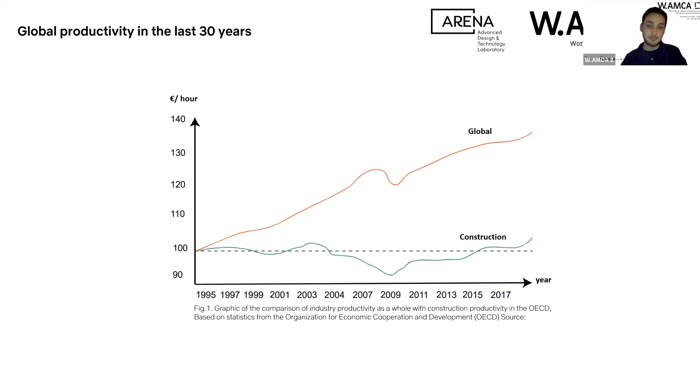So, in architecture, digitalization has been reflected mainly through the implementation of software to design and represent, such as the implementation of building information modeling methodologies and the application of programming interfaces, such as Grasshopper.

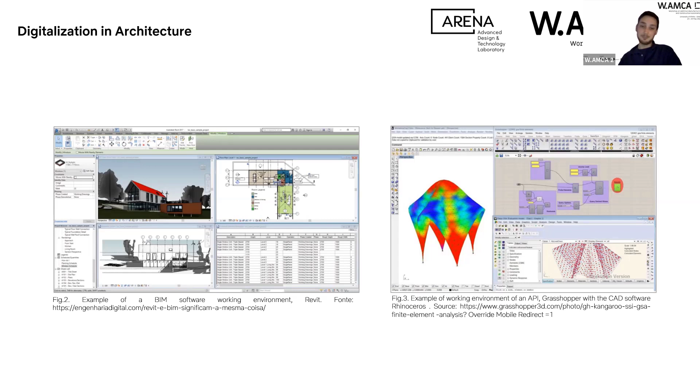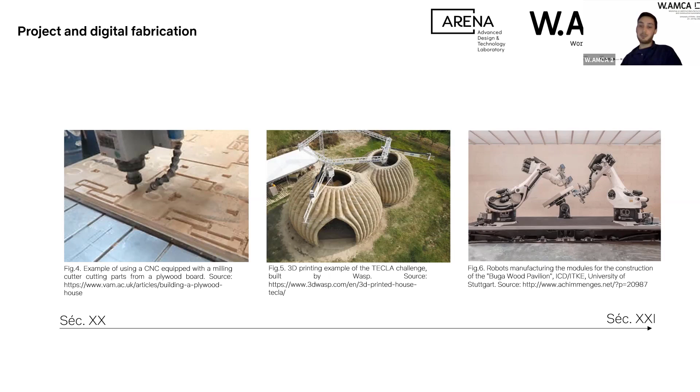The evolution of design software, along with the evolution of numerically controlled machines, the CNC machines, has driven the emergence of new digital manufacturing methods in architecture, with more visible impacts on subtractive and additive manufacturing methods through the use of robotic arms. The most versatile robot for use in architecture and construction is the anthropomorphic arm that is represented in this image.

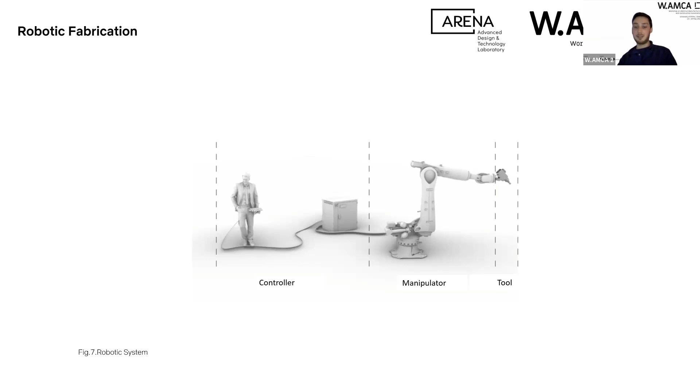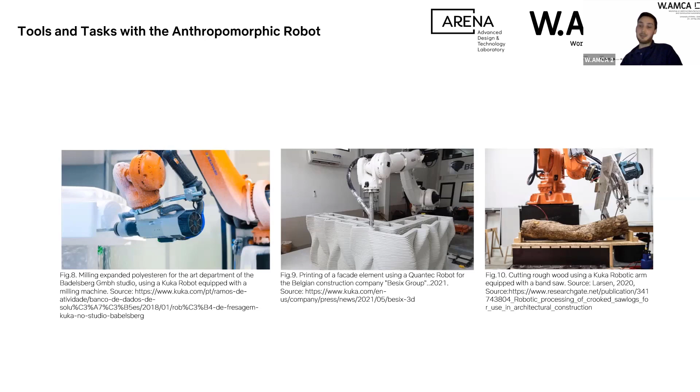This type of robot is basically composed of three parts: the controller, that is the brain of the robot, the manipulator, that is the physical structure of the arm, and the tool, that is the thing that works on the physical stuff. The tools attached to this robotic arm can have direct influence on the function the robot will have, and the most common tools and tasks in architecture using this technology are subtractive tasks and milling, additive tasks with extruders, and assembly using grippers.

For the control of the robotic arms, in recent years, several plugins for Grasshopper have appeared, for example KukaPRC and FuRobot, which are two of the best known. The interest in Grasshopper is justified by the articulation that is possible between the architectural design and the fabrication process.

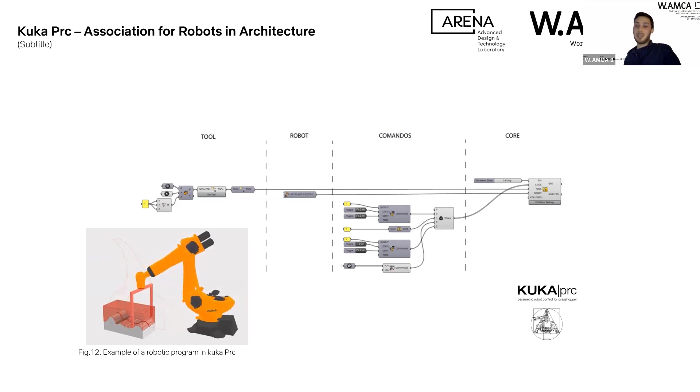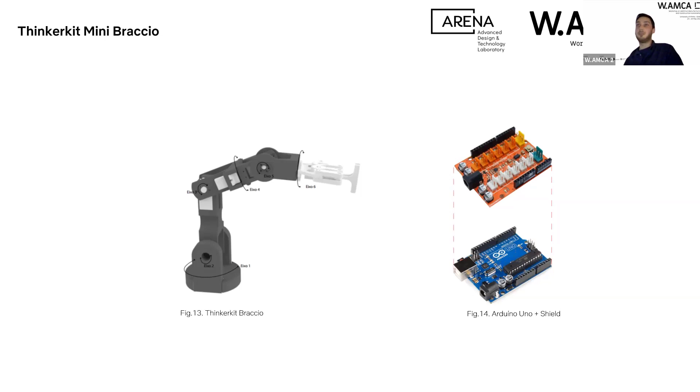Here in school, since the robots that the school purchased have been late, we used in the first phase a small robot, the Thinkerkit Braccio mini robot, and we adapted it to have 6 axes of freedom and tried to use the same plugins for Grasshopper that you use to control a normal robot to control this small Arduino robot.

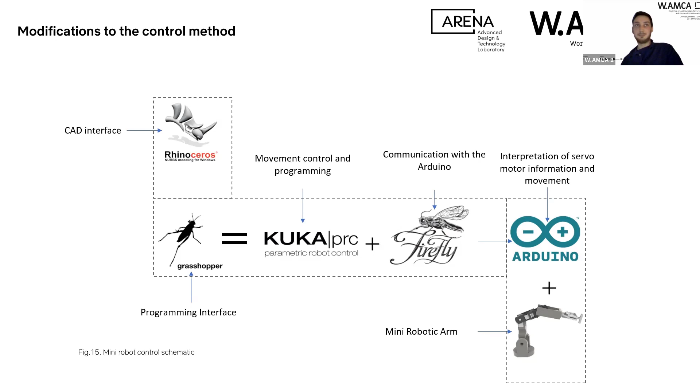To make this happen, we use several plugins for Grasshopper. For example, Firefly to communicate with the Arduino board that controls the servo motors of the small robot. And this is the code that we made in KukaPRC to control that robot and send the information, the values of the axes, to the Arduino board and to the robot.

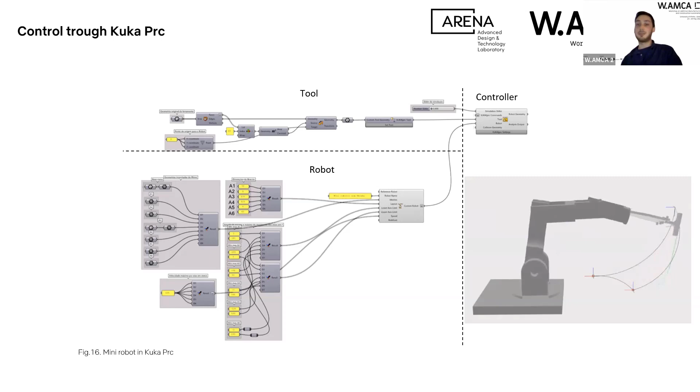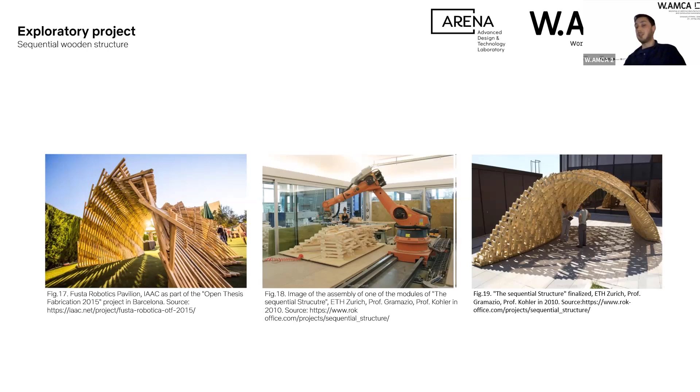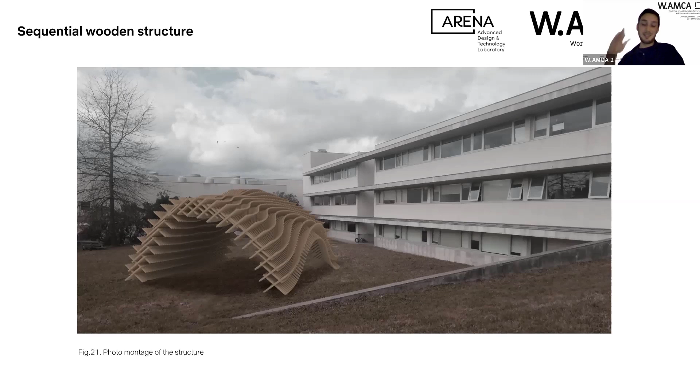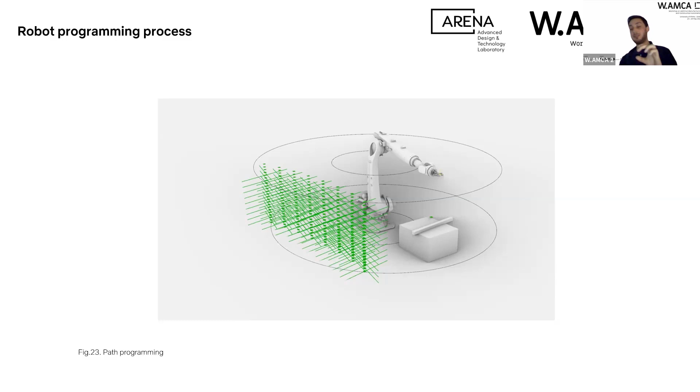So first we divided the structure into modules, with the goal of finding the center of each of them, in order to create an orientation plane for the use of the gripper. And this is the final result with the mini robot. We have the simulation and the physical real assembly process.

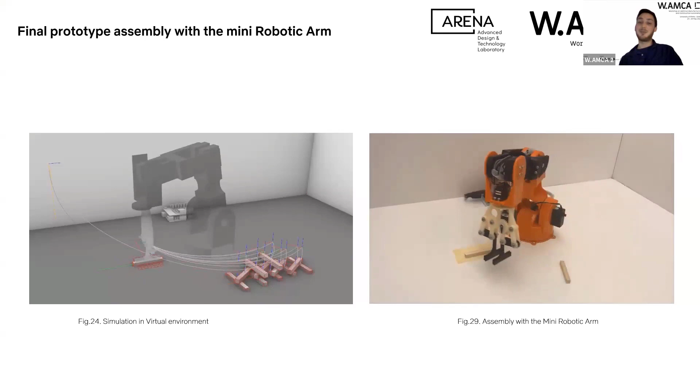So this is too long a video. Probably it's not okay.

So this is the final prototype, the scale prototype that we made.

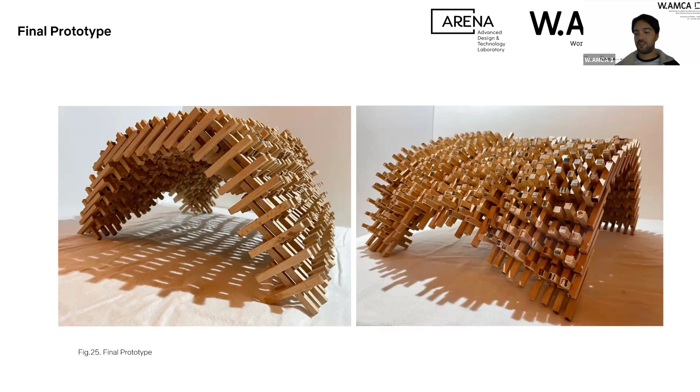So I pass the word to, yeah. Hey everyone. Being the last speaker, I promise to be very fast. I think that's the nicest thing I can do.

So I just want to talk a little bit about the recent things we've been doing for the last few weeks. And what I'm going to show is not really a research question or a design intent. It was more about finding a way to talk to the robot. So a question of control, because we wanted to have some kind of framework that would allow us to answer to different kinds of projects, a wide application of exercises in digital fabrication, not just additive manufacturing.

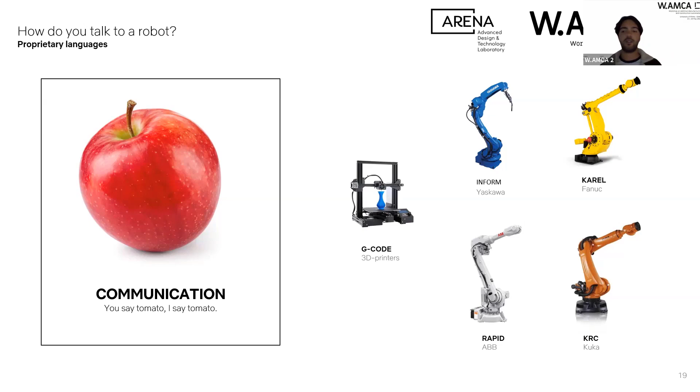So when you start to try to control a robotic arm, you're faced with the question of communication. There's really a problem of language, because it's very easy to be saying tomato and the robot understanding tomato, because, unlike G-code for 3D printers, which is universal, here we have a proprietary language issue where each robot will have its own language, and you need to tailor your code for that. So as an example, KRL, which is the KUKA robot language, is essentially a crystallized list of commands, right? So that's why we call it offline programming.

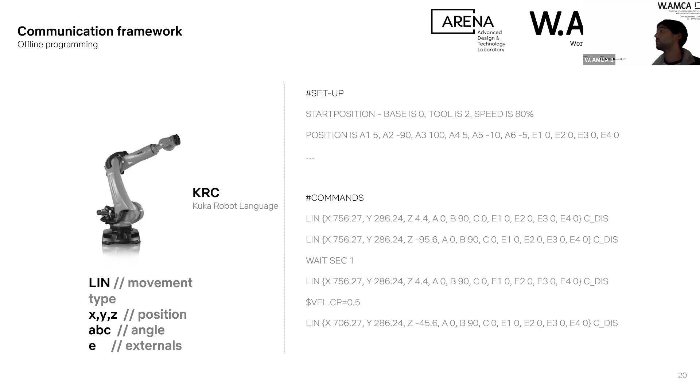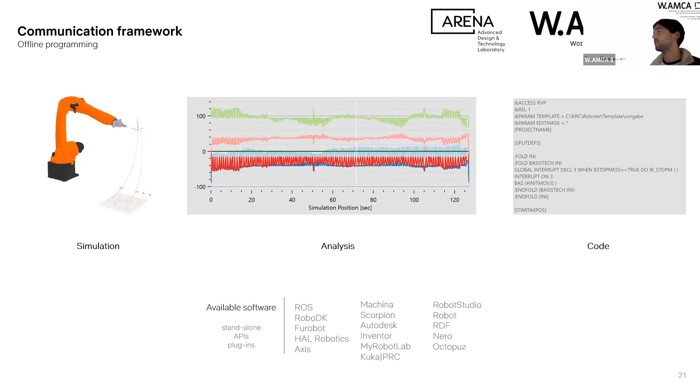And it consists of a setup. So we have a few variables you have to give it, which tool it is using, the base, and then just a list of commands that it will execute. And for that, of course, no one is going to write that code by hand. There are a few software packages that will help you. Most of them have simulation, analysis and the code output as a package. They can come as APIs, standalone packages, or plugins.

But for us, I think our goal was to bypass this command and obey way of operating the robot through text files, and find another way that could be adaptive and reactive, and also parametric, because I guess we architects work in a parametric environment, and of course you want a parametric way of controlling these robots. So online control will offer you this.

It's kind of having a conversation both ways, where the robot will understand new values and you can read values from it in a live setting, and really open up for new applications that offline programming doesn't allow you. So to get into this framework, you really have to ditch commands and accept the world of variables. You can both read and write them as it's operating.

And $VEL_ACT and $POS_ACT are two good examples, because they host the velocity values and the position values. And in order to communicate, to talk to this robot, you need to follow protocol, of course. In the case of KUKAs, to read a variable, you need to send a bit message that looks a bit funny like this, a lot of numbers, and then you specify the variable you want to read, and you'll get an answer, X, Y, Z, if you're asking for the position.

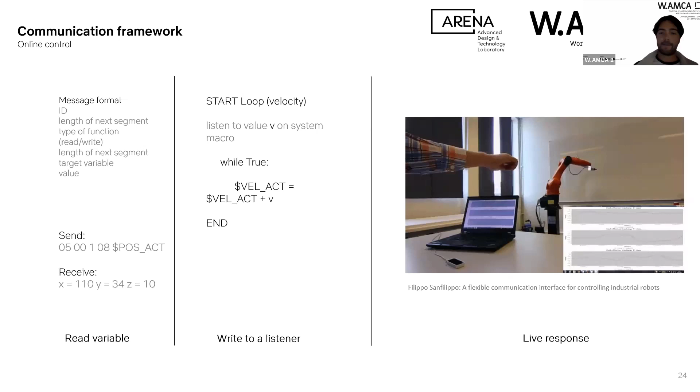So for that, to control the robot in real time, we implemented a client-server solution. So we're using KukavarProxy and JOpenShowVar. We're trying to go fully open source, and I think we are until the very last moment. But it's also something we can replace very easily. And so on this lower level, KukavarProxy is running on the controller, and it will expose the variables. And JOpenShowVar is running on your computer, and it will pass or read the variables that KukavarProxy is providing.

So of course, in the center we have Grasshopper as the main brain. It's obvious why we chose it. And we have some resources that are hooked up to Grasshopper. Rhino, of course, supports the geometry, and Python as well for the computing power. And also because it allows us to bring in a lot of libraries that we cannot run in Grasshopper, like NetworkX or TensorFlow, sklearn, OpenCV, stuff like that.

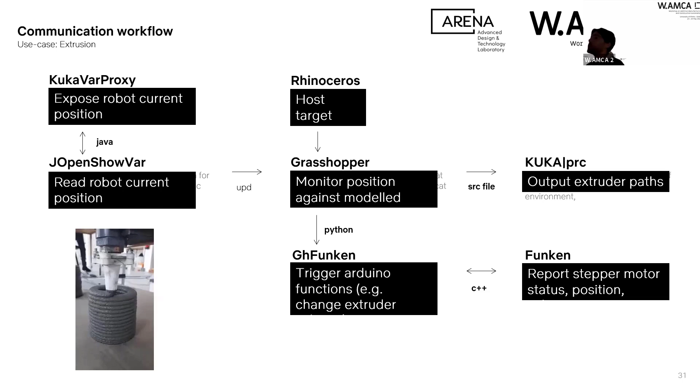So just to make sense of it, this is when this workflow is applied to the extrusion. We just have the first level exposing robot position, and Grasshopper will monitor that position against the model environment. And if it reaches certain boundaries or conditions that we want, it will trigger the function running on the Arduino. And something that we're very close to also implementing is flipping the protocol the other way, because instead of just reading, we can actually write directly from our parametric environment.

So why is this important to have this conversation? In order to leave the lab, really, we need to give the robots more awareness, I guess environmental awareness through sensor data, so you can pre-prepare, pre-adjust before it starts to work. Of course, positional awareness will give it the ability to implement collaborative strategies with humans, and fabrication awareness, so self-correction of paths, extrusion rates, and monitoring the layers.

And right after this, we'll have a deep dive session with Michelangelo. It's not really Michelangelo yet. It's still actually a work in progress. But it's a very simple workflow with parts of what I showed you before. And we'll hopefully make a collective piece that will be preserved after this conference is over.